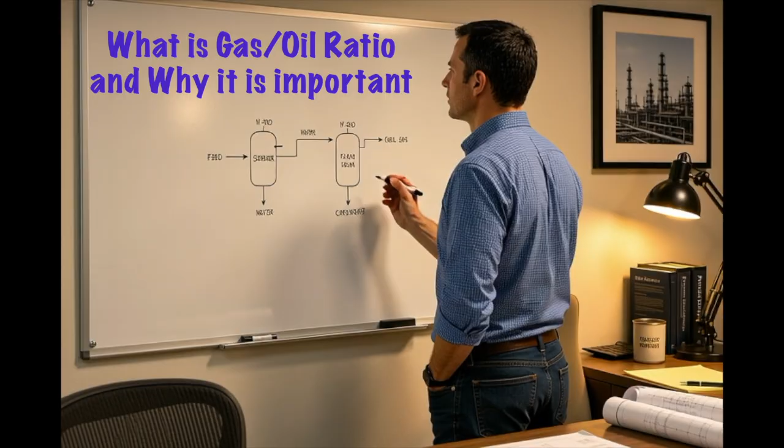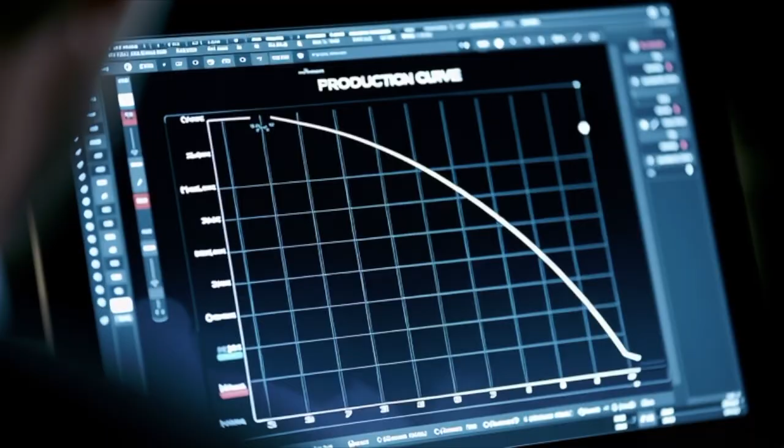Stay with me for the next 5 minutes, and I promise you will walk away more confident and more masterful in how you handle this. So why exactly is the process engineer such a central and sometimes untouchable personality on a project? Here is the simplest way I can put it. Process writes the music, everyone else has to play it. Big statement, yes. But unfortunately, or fortunately, depending on where you sit, it is absolutely correct.

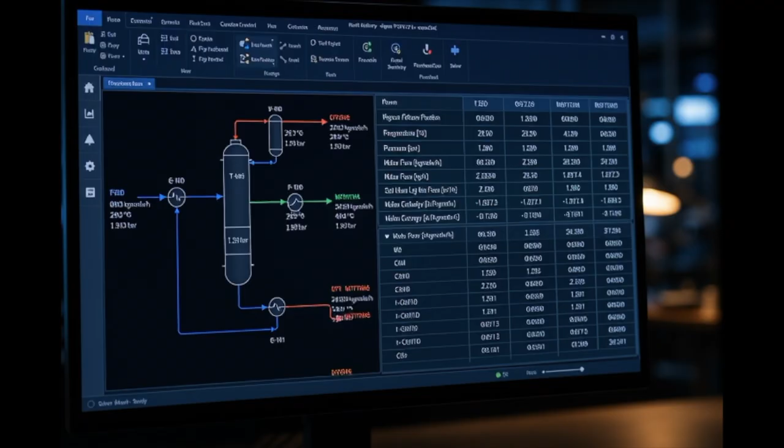Now the deeper question is, what are the beats of that music? And does the process discipline itself depend on someone or something outside of its own control? Because here is the uncomfortable truth. If that rhythm is written wrong at the start, the misery that follows touches every single discipline on the project.

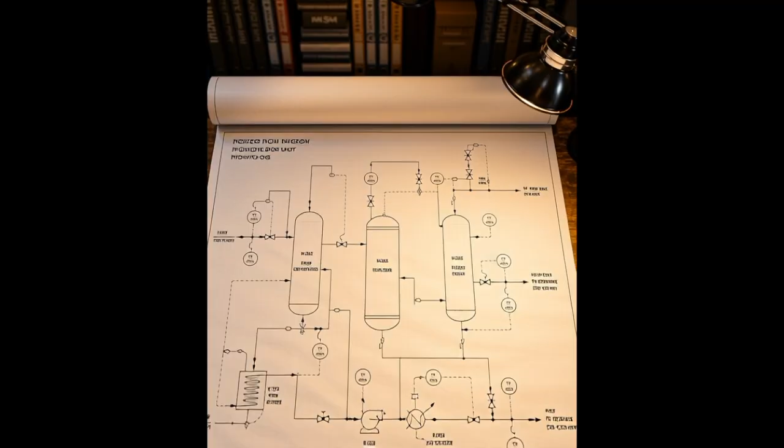The entire foundation of process engineering rests on something called the working fluid, or the operating fluid. Sounds technical, but the concept is beautifully simple. It is the fluid that needs to add value. That is it. If the fluid is sitting in a reservoir, it needs to be drilled.

If it has already been brought to surface, it may be mixed with water, gas, or other impurities, and it needs to be separated, cleaned, fractionated, purified. Whatever word fits the context, the job is the same. Take something raw and make it valuable.

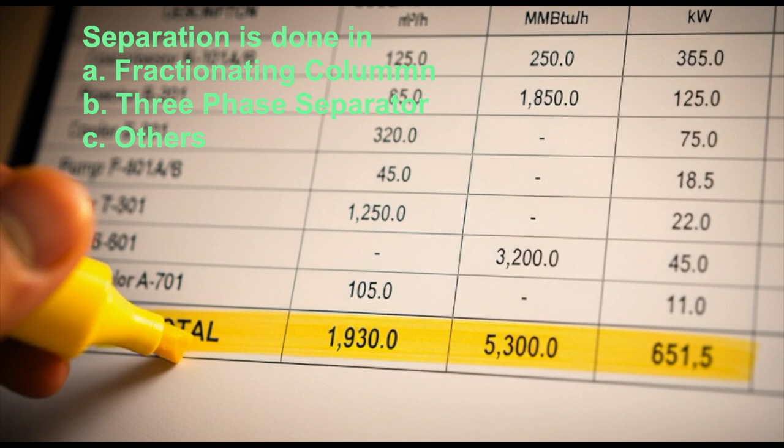Now here comes the $100 million question. Who tells the process engineer what to do and how to do it? The honest answer, nobody. Not really. Sometimes the client gives direction. But here is the problem with blindly following the client like an obedient child.

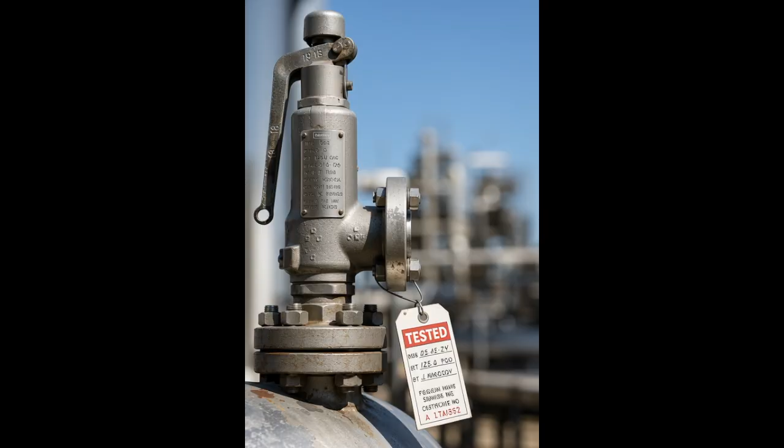6 months later, someone from the same client organization will come back and start questioning every decision. Why this approach and not that one? Why this configuration and not the alternative, which by the way now looks more optimal in hindsight? I have case studies for every single thing I am describing here. Real projects, real situations, and very real consequences.